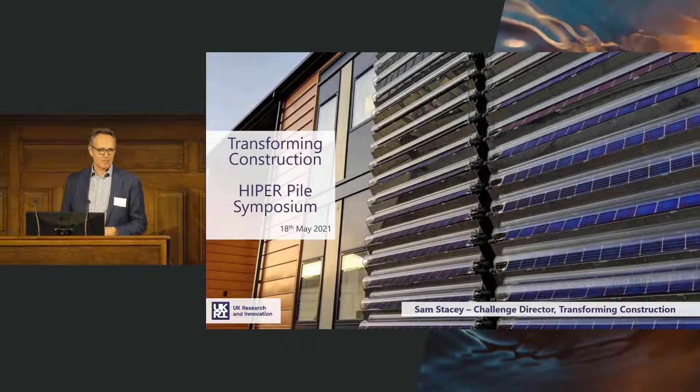So I'm going to talk to you about the Transforming Construction program, of which HIPER is a fantastic example. And it's an ambitious program that we're embarked on here.

I'll start with a quote from Buckminster Fuller, one of my heroes: you never change things by fighting existing reality. To change something, build a new model that makes the existing model obsolete. We're trying to apply that to an entire industry. It's an exciting and daunting prospect, but it's really encouraging to see where we've got to so far with it.

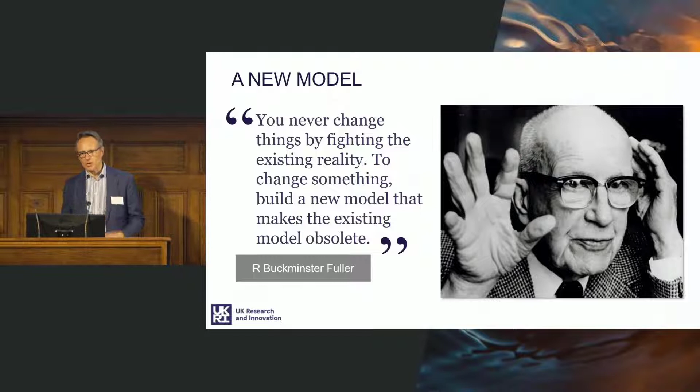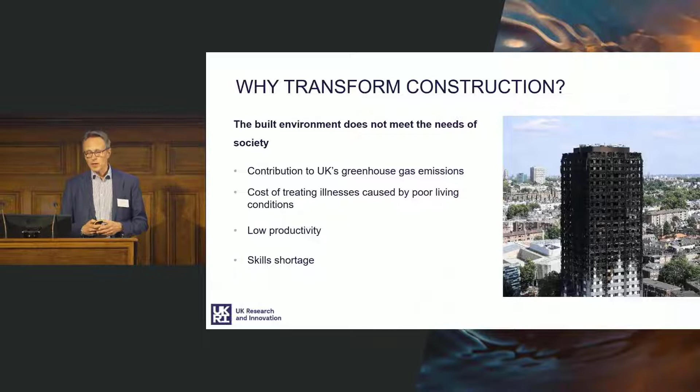So where do we start with this? Why transform construction? I think we all know that there's a hell of a lot that's wrong. Having worked in the industry all my life, there's actually a hell of a lot I'm proud of as well. You see something like Grenfell and it's terrible, and it just reminds you of just how much we need to do with the industry. But we've also produced fantastic buildings over the years.

At heart, I think you can characterize what's wrong with the industry as a focus on cheapness, not value. And it's paradoxical. People think that by trying to drive prices down for everything, they're going to get better value, but you get the opposite. And that's why we've got this messy situation that we're all familiar with.

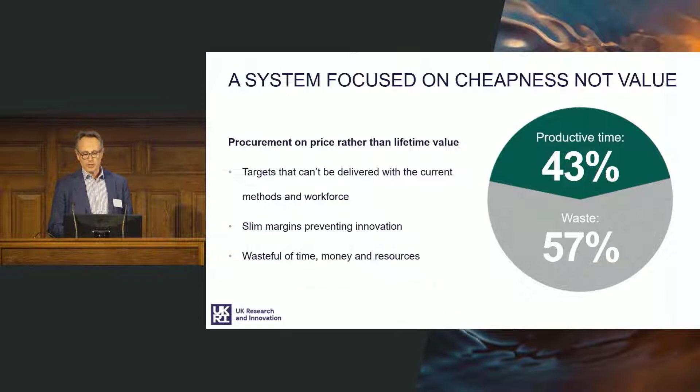So where are we going to get to with this? I think we can achieve an industry that eliminates most of this waste and produces these beautiful sustainable buildings that we're all after. It needs to be based on relationships that are long-term and collaborative, and we see that sort of thing through Project 13 and the integration that we're seeing across a number of projects.

Where value to clients and end users is the main driver of all decisions, and that's ultimate value, I'll talk a bit more about that later on. And we're harnessing all the latest manufacturing techniques, really doing what we dreamed of for years, what Egan dreamed of and so forth, which is transferring that know-how from other sectors, electronics, automotive and so forth, into our industry.

Bringing the whole built environment to life and controlling it with sensors and systems that enable us to monitor and control things accurately, and obviously particularly important to the net zero challenge. And finally, to inspire people to come into our industry.

I think it's probably the case that we've all lived through many years of it being a little bit of a struggle to get the best and brightest to come into our industry. I've loved working in this industry, I think it's the right place to be. I think if you're going to embrace and address the challenges that we face now, and I think that people are that much more conscious of now, this is the industry to be in. Get on with it, find the solutions, apply the solutions.

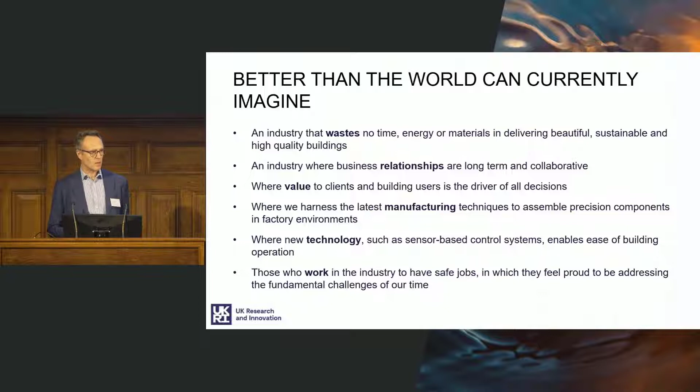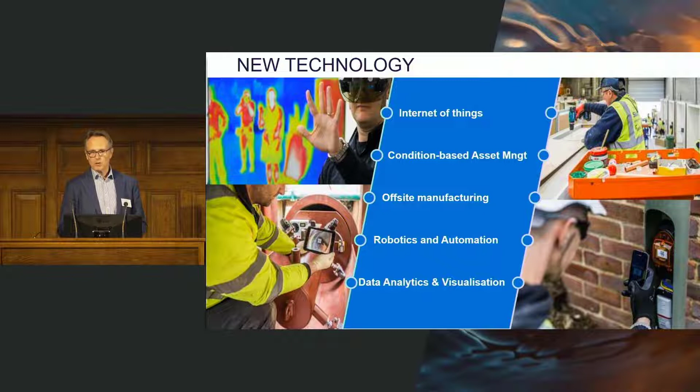So my story is that I was Innovation Director at SKANSKA before this current role, and I saw this fantastic array of things that are out there to improve the industry, but also realised just how you've got to scale that. You've got to work collaboratively. Even a big company like SKANSKA can't do all that much by itself to change things.

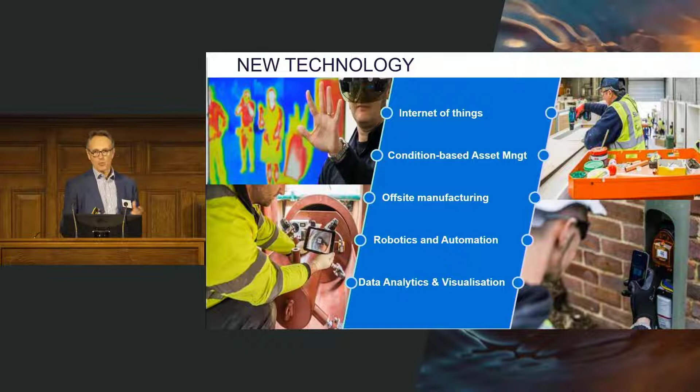So this list of the key innovations or key techniques has so much potential to improve the industry. And I piloted some of these, and with support from Innovate UK, I did work on most of these items. One particular thing was flying factories, where we set up these temporary factories to build things using manufacturing approaches off-site. And again, the stats from that really prove the theory - just how much waste you can take out of the system. At a stroke, you can double productivity by just doing some sensible things.

So I have absolute confidence that these techniques can work if they're applied universally or on a big scale, and you get the industry on board with that. And another thing is the UK's strength.

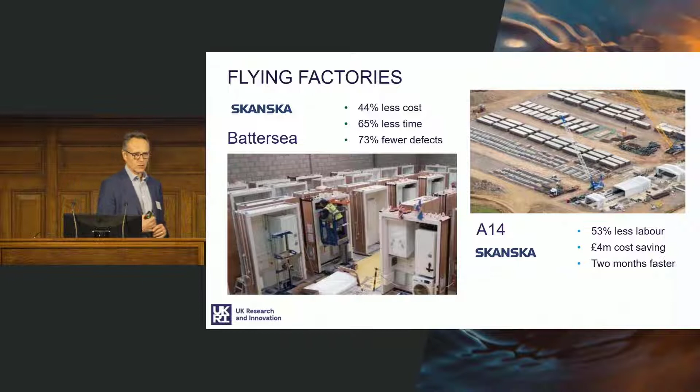I think, particularly in light of Grenfell and so forth, there's a tendency to assume that the UK isn't that great with these things. But actually, I've seen construction operations around the world, and the UK is a leader in most aspects of construction technology. So we're starting from a pretty strong base here.

So what have we got in terms of the Transforming Construction programme? Procurement based on lifetime value, modern methods of construction, and then sharing and scaling best practice across the industry.

It was back in 2013 that the CLC and government got together to work out what they thought was feasible by 2025 in terms of targets for the industry. So fundamentally, these are the targets we've been working towards. The lower emissions target—I think the goalposts have moved on that in a positive direction, in the sense that now that's considered to be a target that's too low.

We've got to get on the journey to net zero. The other targets, I think, are still regarded as ambitious, but as I'll show through this talk, I think we're well on the way to proving that all of those targets, and indeed improving on the lower emissions target, are feasible.

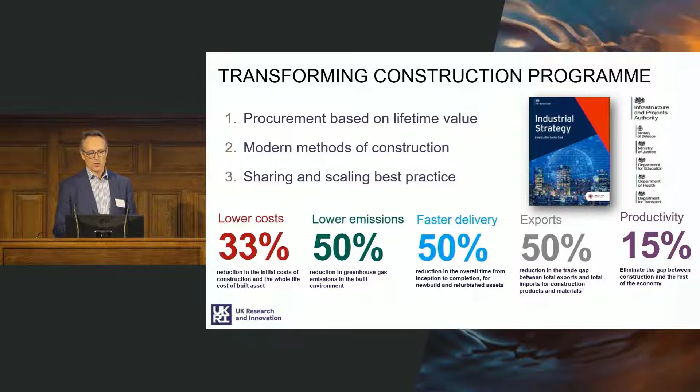And it's about working with these three elements really: the research funding, the commitment and buy-in from industry, and then the strong procurement pipeline, leveraging procurement.

So you see here we've got the 170 million of government funding. When we negotiated the sector deal for construction, the industry committed to 250 million of match funding. The latest stats we've got are showing that actually we're nearer 1 billion in terms of industry investment in the activities we're doing. So a ratio of something like 6 to 1 rather than 1.5 to 1 in terms of the match funding levels. It's a 4-year programme.

We're coming to the end of that 4 years next year, and I think on the basis of what we've achieved so far, there's a very strong case to continue to pump some funding into this. I think using some public money is a great facilitator—we're leveraging a huge amount of private sector investment to go with it. But I think in terms of being a market enabler, that priming of grant funding is very important.

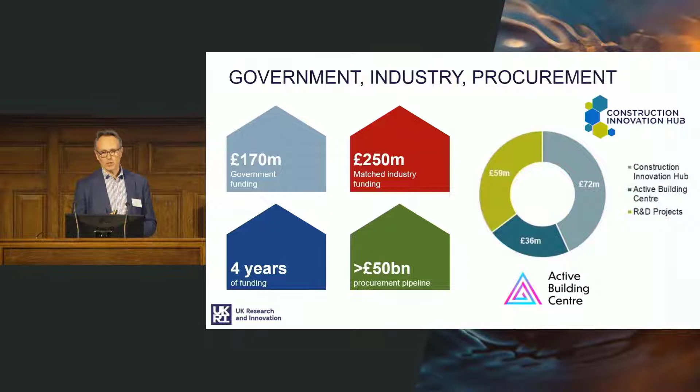We're pushing towards this open rule set for the platform approach to encourage innovation across the piece, so that people aren't hoarding their own proprietary way of doing things. We want innovation around the fundamental building blocks of the built environment, but the interfaces need to be the same so that these things fit together.

From that comes the kit of parts. You need the configurator tools to configure all these things. In line with Hackitt and the Grenfell report, the golden thread of information proves that all of it is safe and high quality.

And then the digital twin that we've all heard about—digitally modeling and optimizing everything through the life cycle of the building. So right from the design stage through the construction of the project, and then using the digital twin to optimize the actual operation and running of the asset.

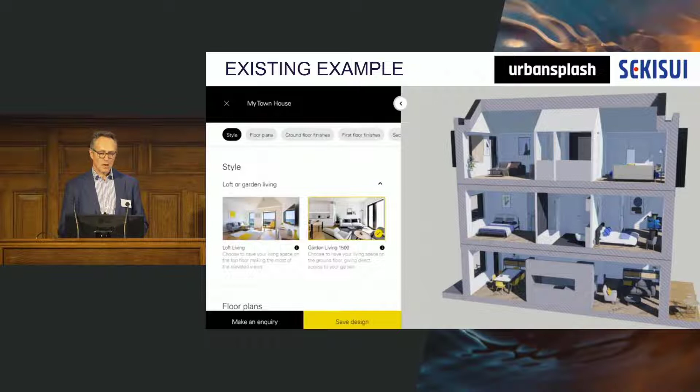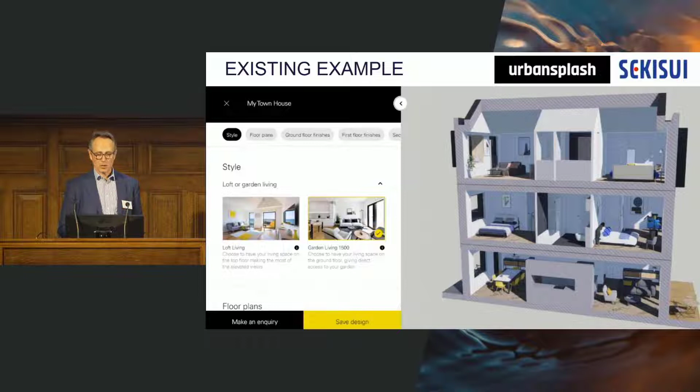And already there are signs, independently of us, that these approaches are being applied. Urban Splash got together with Sekisui, this massive Japanese house builder, and are essentially applying very successfully in the UK this sort of platform approach, really encompassing all those elements that I talked about.

It's based on this 4 capitals model: produced capital, natural capital, social capital, human capital. The process then takes you through the value definition, the risk profile, the procurement strategy, and the appointment strategy for projects. The expectation is that practical tools will be out there very shortly from the Construction Innovation Hub, along with a facilitation service to hold organisations' hands through that.

The Construction Innovation Hub is also on the way to producing the platform rulebook. So they are developing this kit of parts rule set for buildings, focusing on mid-span buildings which cover hospitals, schools, apartment blocks, offices, all these sorts of things.

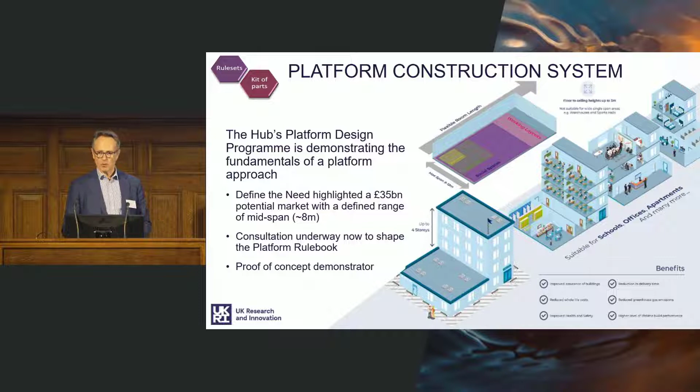They've divided a building into, as it happens, 13 building elements. They'll be producing a rule set which will, I hope, encourage innovation in the market and get the maximum number of players working into that system.

In a sense jumping the gun here, you've got Landsec, Easi-Space, and Bryden Wood working together to actually do that on a live building. The photo here is called the Forge. It's an office building going up in South London, applying that approach. And again, encouraging findings from that — it really is working.

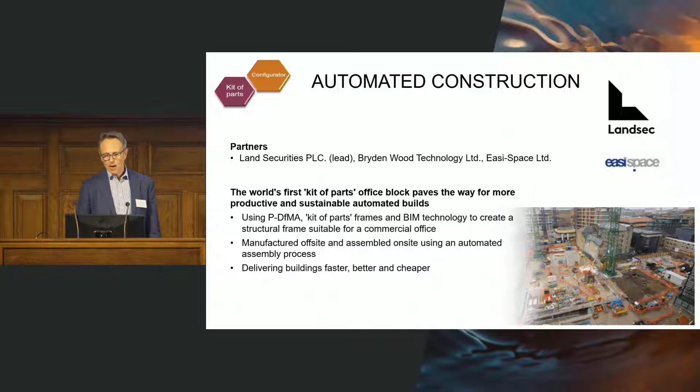Also in the housing sector, addressing the housing sector, we've got a big consortium involving Barratt's, L&Q, and, goodness, I think about 40 other organisations involved in applying this same approach to the housing sector. Once again, it's proving we're getting that critical mass, we're getting that momentum around it.

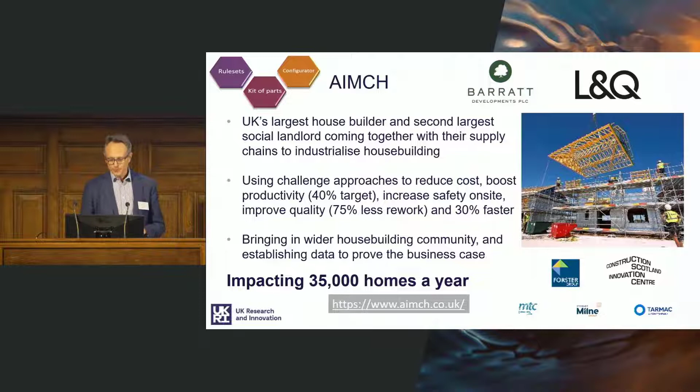The golden thread and the technologies associated with that are being pushed forward in various ways, and this is one of those. Laing O'Rourke and Trimble working together on these smart helmets that record everything that's going on, so you've got that digital record, that proof of quality, access to information, and the analytics behind that to help optimize the processes.

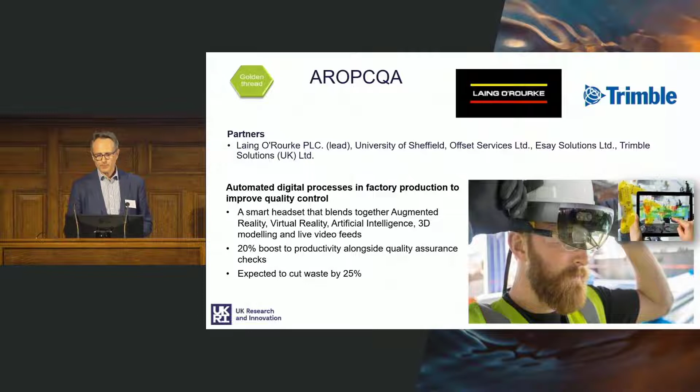A vital part of this whole equation is the race to net zero, and that's where the Active Building Centre particularly comes in. The Active Building Centre is essentially developing tools to configure the best set of solutions for any given community or building around active building technology.

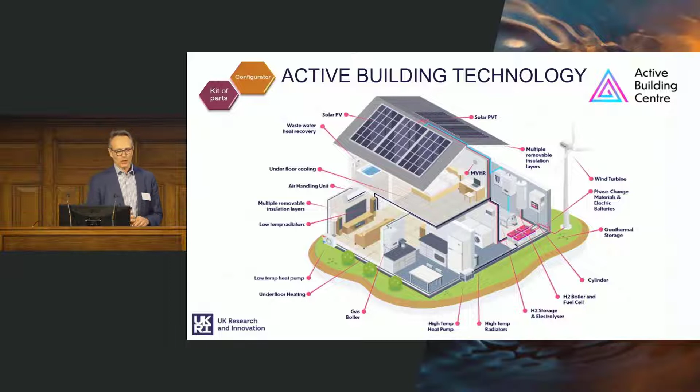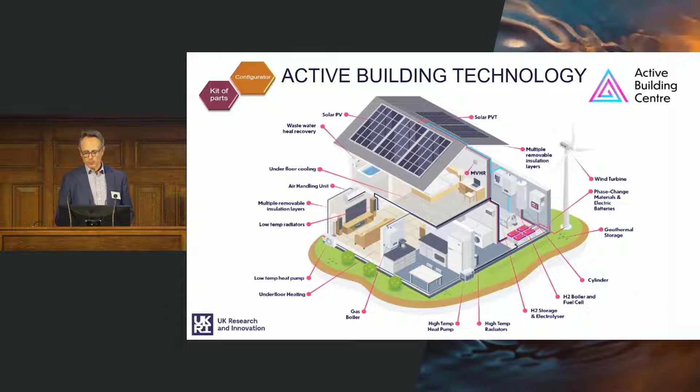Energy capture, energy storage — we'll hear more about that in relation to piles later on — and then the control systems to manage all those components in a building setting or in a community setting as you go forward. The active building controls relate to having sensors on all that kit, collecting that data, and then being able to share, store, and manage peaks and so forth across a community.

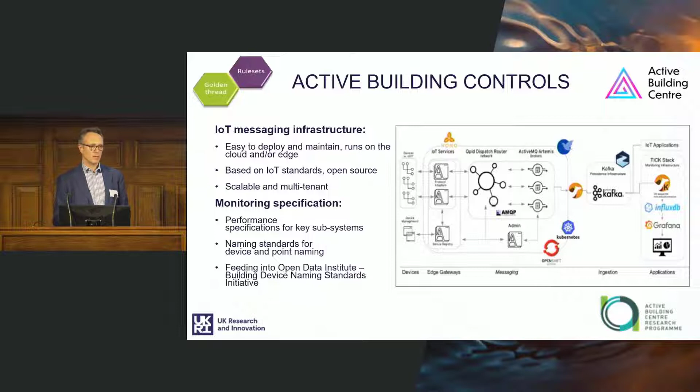And again, the thrust from my side is always about getting it out of the lab, getting it out of the research centres, and getting it into practical, scalable implementation across the built environment.

Retrofit, I should mention, is not a key part of our programme, but it certainly will be an important part of the transformation of the built environment going forward, and we're doing a certain amount on that at the moment. So a little bit on fabric solutions and the Active Building Centre helping to configure that.

Applying the platform approach to kit of parts retrofit solutions, really around energy pods and around wrapping existing buildings to improve their insulation performance.

And then a number of universities working together on digital models of the whole built environment. They've got this fantastic system where essentially you do drive-by surveys of houses, and then use analytics to configure mass solutions to retrofitting and upgrading these buildings.

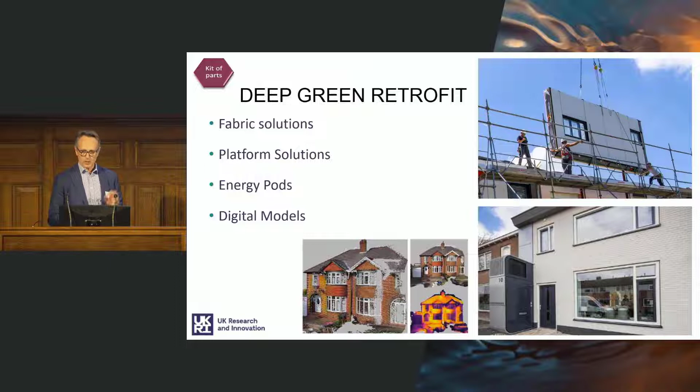And I think incredibly they're on their way to having modelled all the housing in Wales with this. It's amazing that it can be that efficient. But I think the speed at which we can apply retrofit will be quite stunning, and we need to do that as well in order to meet our obligations. What's extraordinary, I think, is that we're really seeing how the solutions can work for this.

Part of the output of the programme will be to take all this great work that we've done and make it accessible and practical to the wider industry, to players across the industry. And I'm not just talking about the converted here, but this huge range of organisations that work in the construction industry. So behind the scenes, we're developing a taxonomy model and a user interface that will enable people to access the outputs from the programme and apply them to their particular needs, depending on the kind of organisation that they are.

From the client side, one of the main drivers, possibly the primary driver, is this construction playbook that I hope a lot of people have heard of. This is the government saying how it will mandate its procurement of construction, and the mandation of these kind of principles. So no longer a nice to have, but actually saying this is how it will be done. We will demand manufacturing approaches to construction, we demand the use of digital techniques and so forth. And the work we're doing here will enable that to be delivered by the supply chain, we hope.

And I'm also pleased to see that RIBA are on board with regards to updating their plan to guide architects through this process.

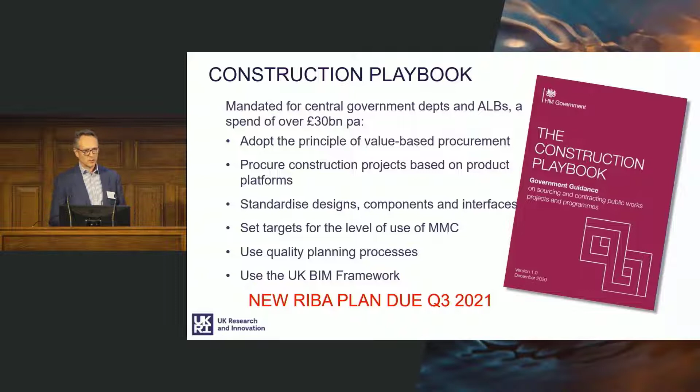Skills is a really important part of this. So we're working with skills providers, the CITB, supply chain school and so forth, to propagate the skills. We create the knowledge fundamentally. There's a degree of training the trainers that comes from us, but a vast range of organisations need to get involved in upskilling the workforce.

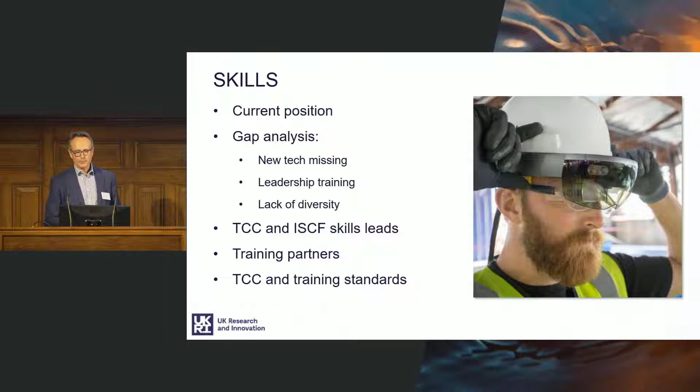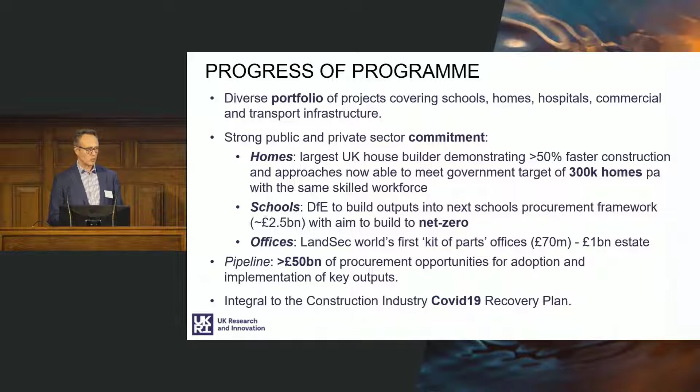And as you'd expect from any government programme, we need to monitor very carefully what we're doing, prove that we're providing value for money for the taxpayer. And the data is very, very positive at the moment.

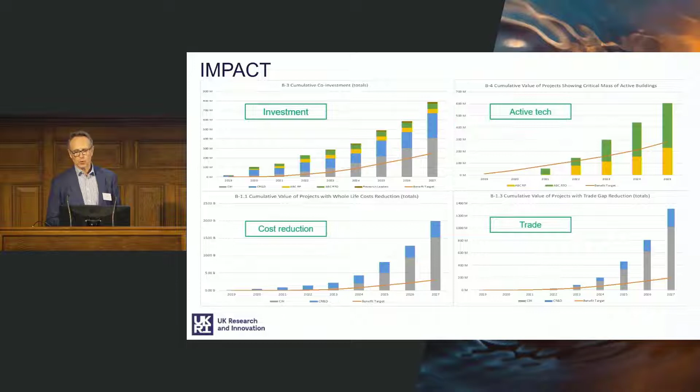So we're finding that the organisations that we're invested with are coming back to us and saying there's a lot of interest in terms of exports for what they're coming up with.

All this is associated with a major publicity campaign which is ramping up. I hope that people have been seeing a lot of activity in the press. Value Toolkit certainly got a lot of attention in the press. I hope you're seeing articles in the trade press, a little bit in the national press and so forth. We're part of COP26, so I think there'll be a lot of visibility through COP26 as well around what we're doing.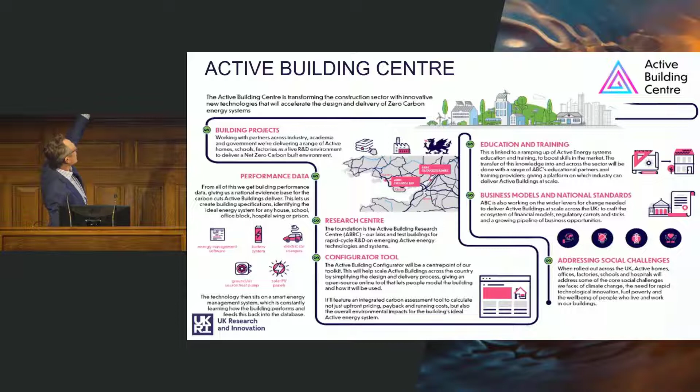And the Active Building Centre will be this significant national centre to enable the long-term propagation of these results. Sorry about the busy slide, but it's got the essential building blocks in there: having the building projects, having the performance data from them, having the research centre where companies can come in and test their solutions, the configurator tools for all the tech that I mentioned, the education and training materials from that, and also the business models to show how these things can be financed and developed.

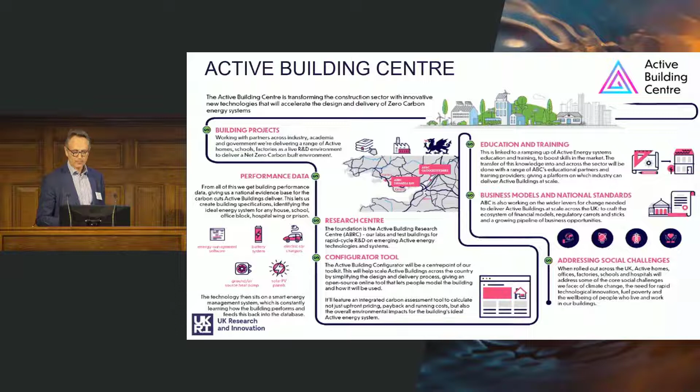So from all this, benefits for, I think, everybody. That's the amazing thing. This is not a compromised situation. The building owners, the building users, the industry, the operators, the environment, all benefiting from this new model approach.